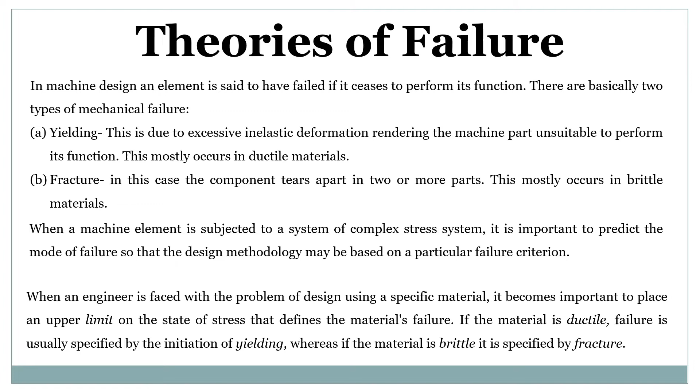When a mechanical engineer is faced with the problem of design using a specific material, it becomes important to place an upper limit and lower limit so that the material will not fail.

जब आप थोड़ा सा और गहराई में सोचेंगे, तो बेसिकली डक्टाइल एंड ब्रिटल मटेरियल में देयर इज नो एनी काइंड ऑफ शार्प डिमार्केशन। हाउएवर ए रफ गाइडलाइन इज दैट इफ परसेंटेज इलोंगेशन is less than 5%, then the material will be treated as brittle, and if it is more than 15%, then it is called ductile.

However, there are many instances when a ductile material may fail by fracture. This may occur if a material is subjected to cyclic loading like fatigue, long-term static loading at elevated temperature, that is called creep, impact loading, sudden load, work hardening, severe quenching, and yielding and fracture can be visualized in a typical tensile test and shown in the clipping.

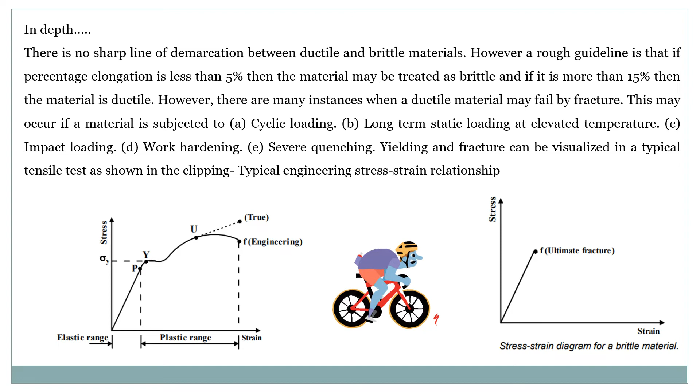There are so many theories of failure, but from our syllabus point of view, there are 5 important theories of failure. One is maximum shear stress theory for ductile material, also called Guest and Tresca theory. Maximum principal stress, Rankine theory. Maximum normal strain theory, also called Saint Venant theory. Maximum shear strain or distortion energy theory. Last one is maximum total strain energy theory.

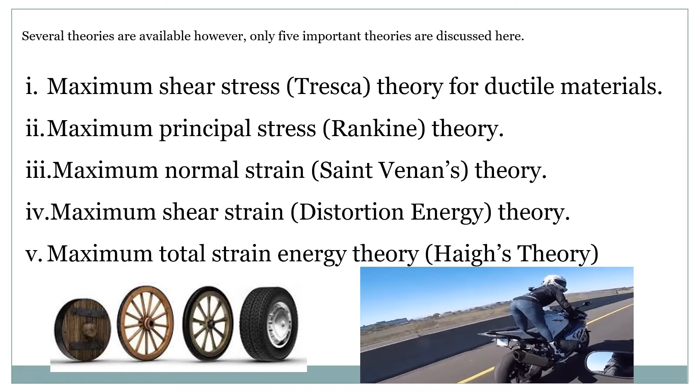Now comes the maximum shear stress theory for ductile material. It states that a member subjected to any kind of stress fails when the maximum shearing stress in the member becomes equal to the yield point stress in a simple tension or compression test.

Maximum shear stress in a material under uniaxial stress condition is one half of the normal stress, or you can say maximum stress.

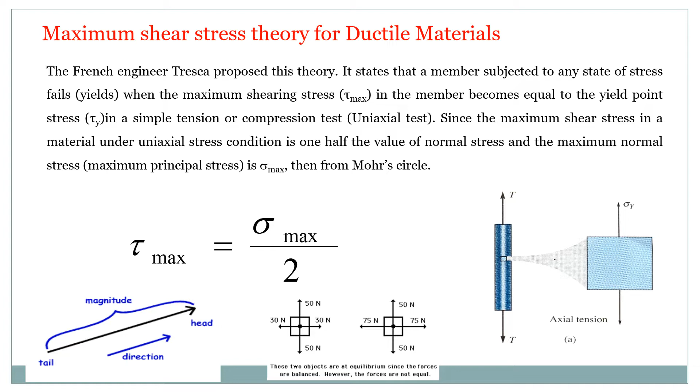In case of biaxial stress, we have already discussed in principal stress, tau max is sigma max minus sigma min upon 2, or we can say sigma 1 minus sigma 2 by 2. Tau max should always be less than tau y, that means yield shear stress.

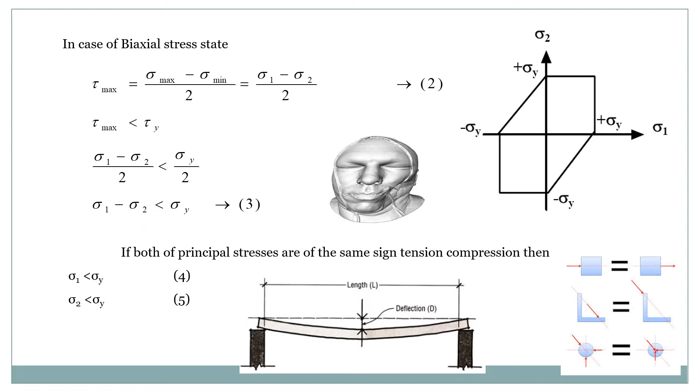That means sigma 1 minus sigma 2 should be lesser than sigma y। अर्थात सिग्मा 1 और सिग्मा 2 दोनों ही अपने रेस्पेक्टिव यील्ड स्ट्रेस से, generally tau max is half the value of either sigma 1 or sigma 2.

In the second and fourth quadrant, where sigma 1 and sigma 2 are of opposite sign, tau max is half of the arithmetic sum of the two, sigma 1 and sigma 2. Sigma y is the difference of sigma 1 minus sigma 2, where sigma 1 is the maximum and sigma 2 is the minimum.

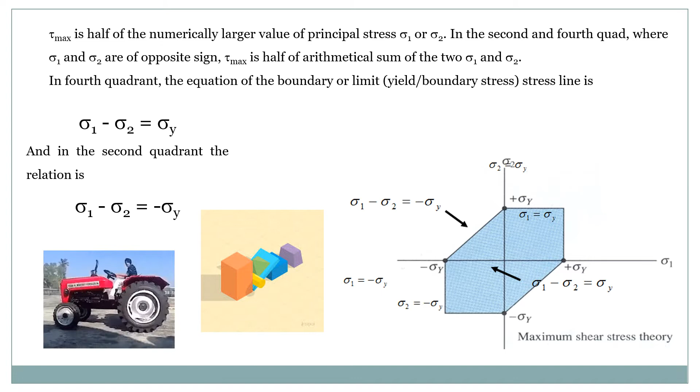Next theory is the maximum principal stress theory, that is also called Rankine theory. This is the plane.

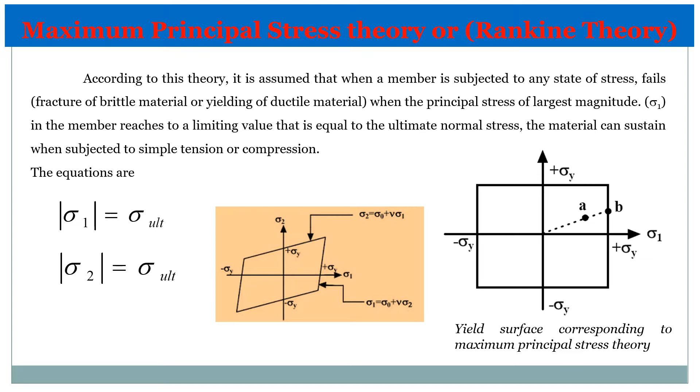According to this theory, it is assumed that when a member is subjected to any state of stress, fracture of brittle material or yielding of ductile material occurs when the principal stress of largest magnitude reaches a limiting value equal to the ultimate normal stress the material can sustain under simple tension or compression. Basically, when sigma 1 or sigma 2 becomes greater than the ultimate tensile strength, the material will fail. That means the maximum developed principal stress should be lesser than the ultimate tensile stress.

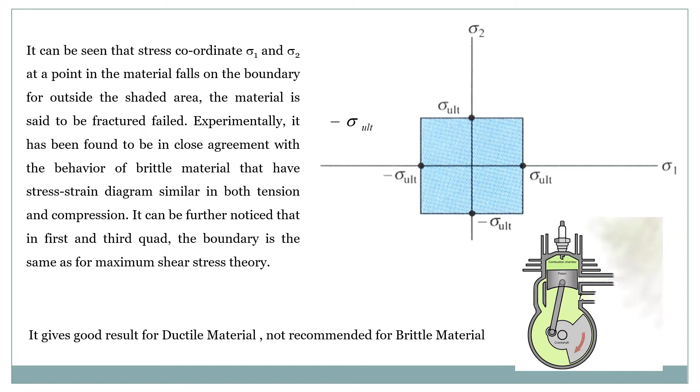Experimentally, this has been found to be in close agreement with the behavior of brittle materials that have a stress-strain diagram similar in both tension and compression. It can further be noticed that in the first and third quadrant, the boundary is the same as for maximum shear stress theory. This theory gives good results for ductile material, but it is not recommended.

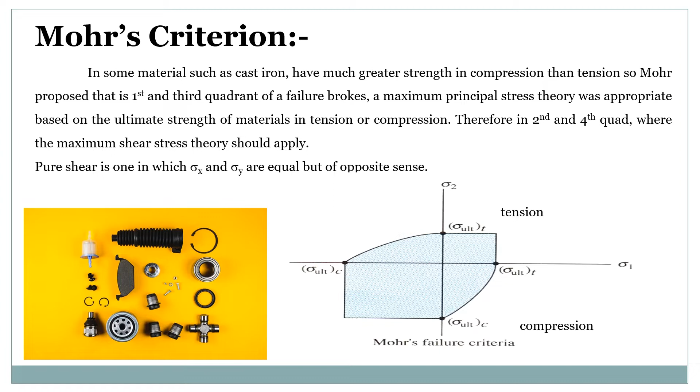In this, a Mohr's circle criterion is also discussed. You have already seen Mohr's circle in the strength of materials subject. Basically, Mohr's circle is nothing but a graphical approach to find the value of maximum and minimum principal stress. So you can draw it like this.

You can see here, this is the coordinate axis, this is the shear stress, this is the normal stress. We are going to calculate for brittle material, so it is the ultimate tensile stress.

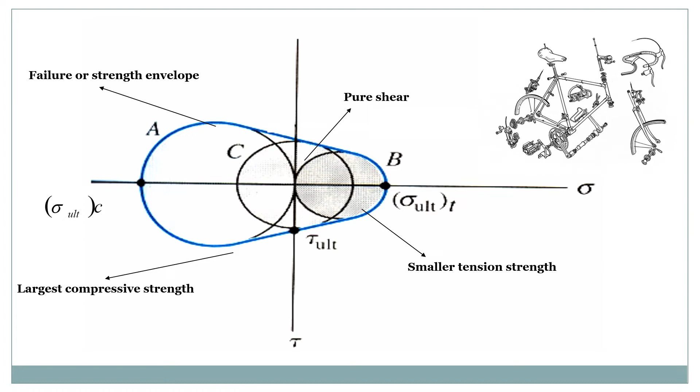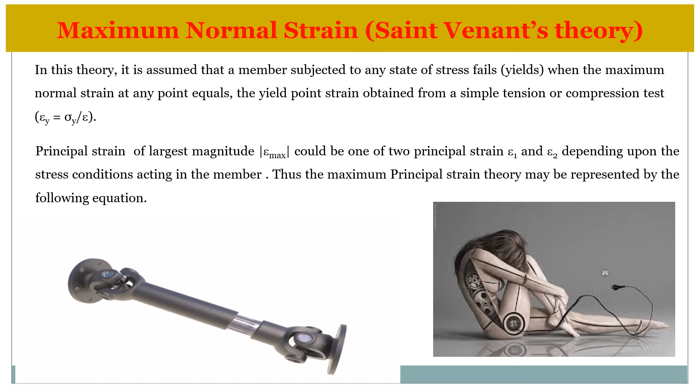The principal strain of largest magnitude, epsilon maximum, could be one of two principal strains, epsilon 1 and epsilon 2, depending upon the stress condition acting in the member. Thus, the maximum principal strain theory may be represented by the following equation. We have to discuss epsilon max, epsilon max.

Again, we have calculated sigma x, sigma y, sigma z in terms of Poisson's ratio. In the original direction, epsilon x equals sigma x upon modulus of elasticity. When we calculate for sigma y, that means epsilon y in the y direction, Poisson's ratio will be involved in the negative direction, because epsilon x is tensile strain while sigma y and sigma z are compressive.

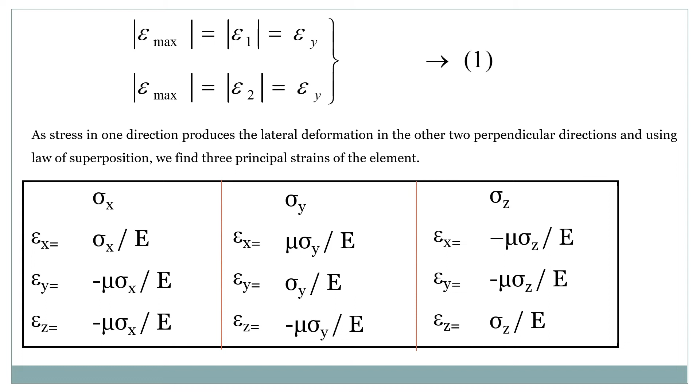Similarly, we have developed epsilon x and epsilon y, which you can see very carefully, and it will be summed up for epsilon z. Similarly, we find at one point, taking into consideration all three stresses acting on a member.

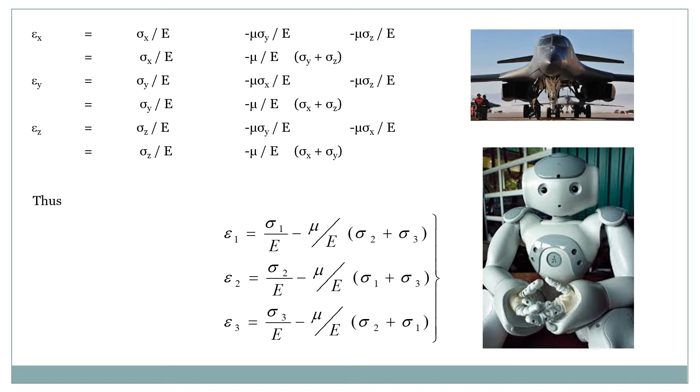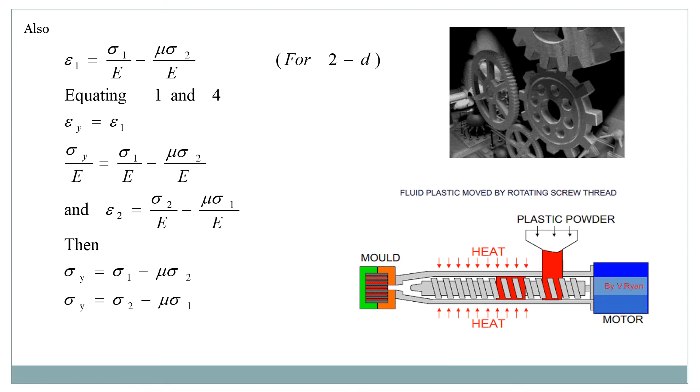Now, if sigma 3 is 0 for a two-dimensional body, then we can equate this equation, and at last we can find sigma y equal to sigma 1 minus mu sigma 2, or sigma y equal to sigma 2 minus mu sigma 1. It is valid for the system.

Now, the last one is the maximum total strain energy theory, also called Haigh's theory. According to this theory, failure would occur when the total strain energy absorbed at a point per unit volume exceeds the strain energy absorbed per unit volume at the elastic or tensile yield point. This may be given by half of sigma 1 epsilon 1 plus sigma 2 epsilon 2 plus sigma 3 epsilon 3 equal to half of sigma y epsilon y. It has been calculated in the direction of y.

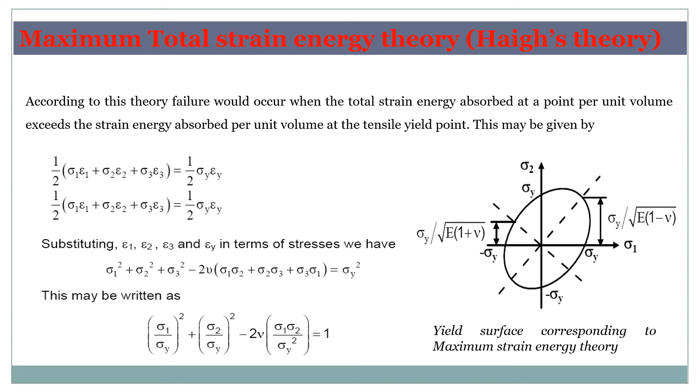Similarly, the second equation is very much similar. Substituting epsilon 1, epsilon 2, epsilon 3 in terms of stresses, we can find this equation. This is the important equation, and further it can be written in a quadratic equation like this, and this is the Mohr circle representation.

Now the last one is the maximum shear strain energy, also called von Mises criteria. According to this theory, a member subjected to any state of stress fails when the distortion energy per unit volume at a point becomes equal to the strain energy of distortion per unit volume at failure in uniaxial tension. The distortion strain energy is the energy associated with the change in the shape of the body.

The total strain energy per unit volume, also called strain energy density, is the energy stored internally throughout the body's volume due to deformation produced by external loading.

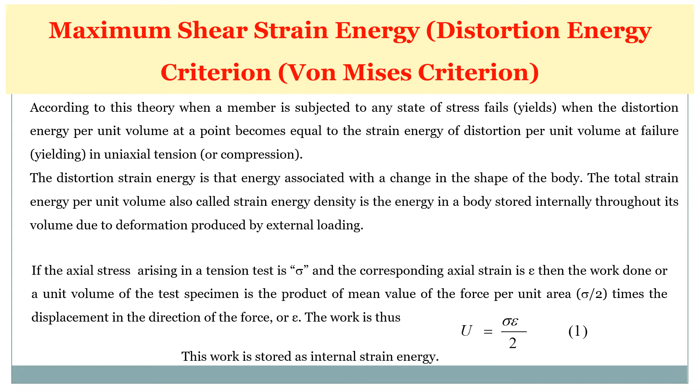If the axial stress arising in a tensile test is sigma and the corresponding axial strain is epsilon, then the work done for a unit volume of the test specimen is the product of the mean value of the force per unit area, that is, ultimate maximum strain energy equals sigma epsilon upon 2, stress into strain upon 2. This work is stored as internal strain energy, like a rod when we elongate it by applying external force, this kind of energy will be stored up to a certain limit.

When this energy exceeds the limiting energy, the material will fail. When an elastic element is subjected to triaxial loading, with sigma 1, sigma 2, sigma 3, the stress can be resolved into three principal stresses.

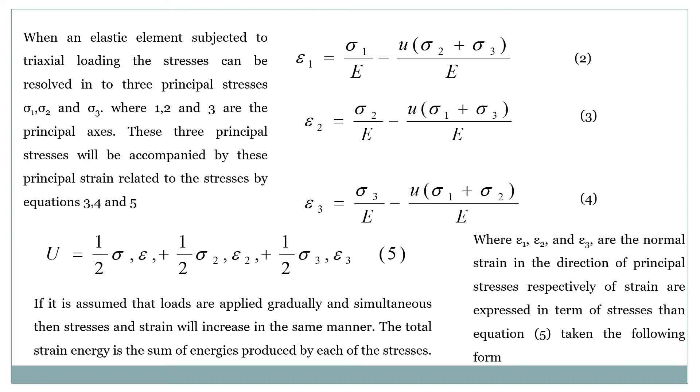It has already been shown that you can find the strain energy as half of sigma 1 epsilon 1, plus half of sigma 2 epsilon 2, plus half of sigma 3 epsilon 3, which gives the strain energy in the material. This is the very important equation: U equal to 1 upon 2E times sigma 1 square plus sigma 2 square plus sigma 3 square, minus 2 mu into sigma 1 sigma 2 plus sigma 1 sigma 3 plus sigma 2 sigma 3.

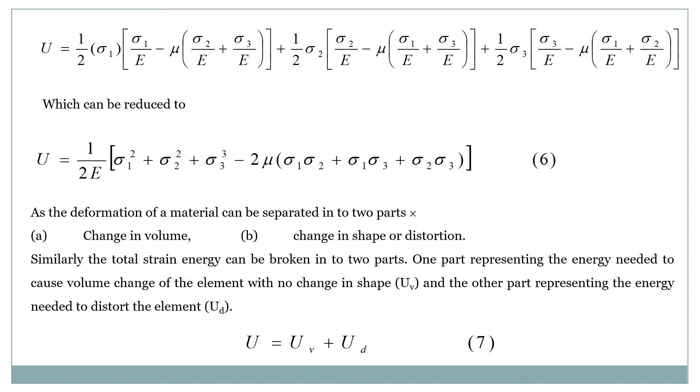This is a very important equation, as the deformation of material can be separated into two parts: change in volume and change in shape, or distortion. Due to volume and due to distortion, both will be added to find the final strain energy developed inside the material. These are a few figures showing how the stress acts and the material gets distorted.

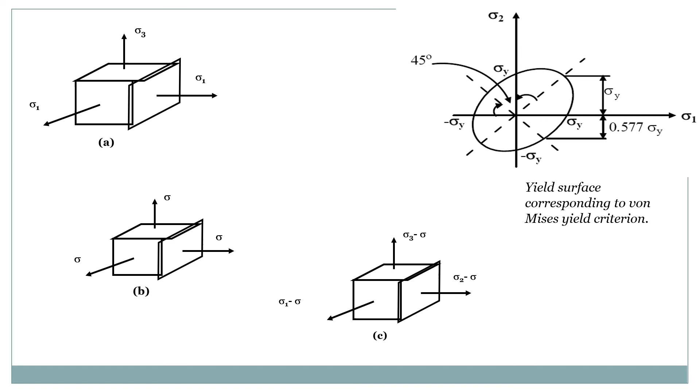This is the yield surface corresponding to von Mises criteria that we have already discussed. Basically, this is the ellipse, that is the Mohr circle. Sigma y, 0.577 sigma y, this is the lower value, and this is the higher value.

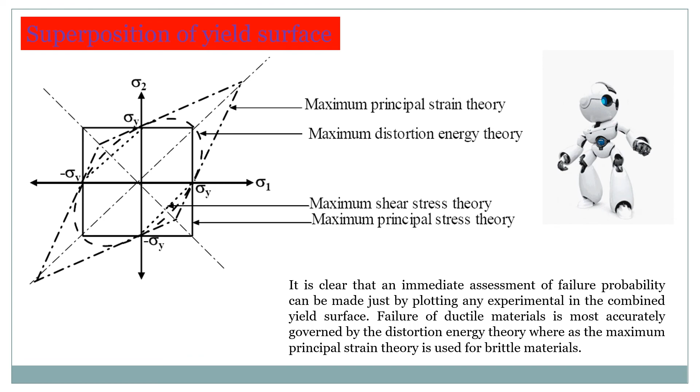It is clear that an immediate assessment of failure probability can be made just by plotting any experiment on the combined yield surface. Failure of ductile material is most accurately governed by the distortion energy theory, whereas the maximum principal strain theory is used for brittle materials.

In failure theory, the most important thing is the statement of each and every failure theory, and where it is applicable. That means the statement and application are important from the examination point of view.